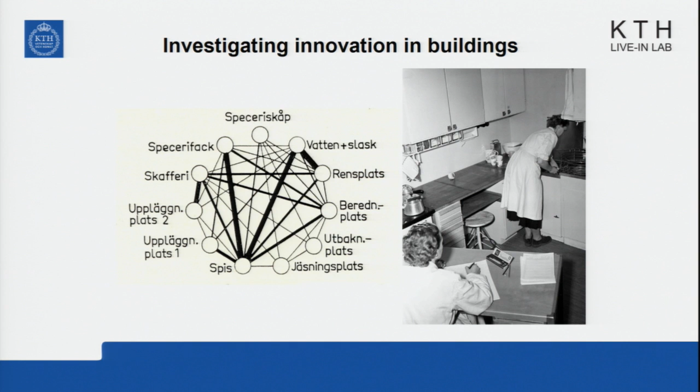I wouldn't say that. We rather have a problem when people are sitting still too much. But the regulations that we base our production of buildings on are still based on a society we do not live in. Maybe we should do this research upside down: look at how we can increase the steps we take in the kitchen. Maybe that's the society we're living in today.

Another thing with buildings: we're around 30 years behind, I would say, many other industries. Cars have auto brakes, climate control, soon autopilot. What do we have in our homes? We have to manually walk to the window and open it to get fresh air into the apartments. I don't know if that's so very smart.

We don't have the services from buildings that we would like. And still they use around 30% of the energy in the world, and they are responsible for around 40% of the CO2 emissions. Even though they don't deliver the services we want, they only make it possible to stay indoors, not joyful.

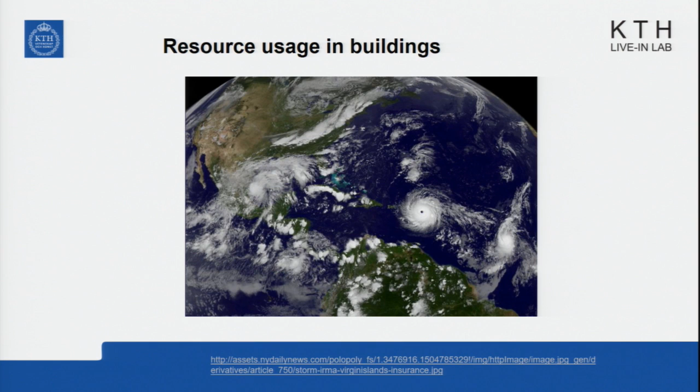So now we have a big task here. We're going to build around 700,000 apartments in Sweden over a period of 10 years. So either we can produce these buildings as Boverket likes, or not likes maybe, but they say it's okay.

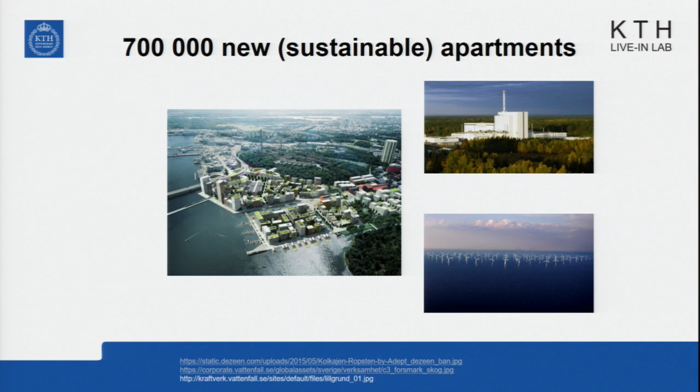We can build like old light bulbs, 90 kilowatt hours per square meter. And if we do that, then we need to produce one nuclear reactor or 1,000 2-megawatt windmills just to give the heating needed to these apartments.

Or we can produce like this, halogenlampa, I hope you understand. It's quite bad, I mean you don't want them, but they work, they're a bit more energy efficient. And then you can reduce the number of windmills needed, for example, to half.

Or you can do LED lamps and reduce the energy use connected to buildings by tenfold. You can find these on the shelves in the stores: solar PVs, heat pumps, connections between these systems, hot water storage, electricity storage. You have everything on the shelves. You just need to know how to connect these systems in order to make buildings a bit smarter and more sustainable.

But it seems like the developers do not know this, or they don't care.

So now it's my 15 minutes of fame here, so I can talk a bit about my research. I did a study a few years ago and found 37 barriers to why we don't produce smart buildings. Yeah, of course we could find a bit more, I guess, but around 37 it got saturated, I didn't find any more information.

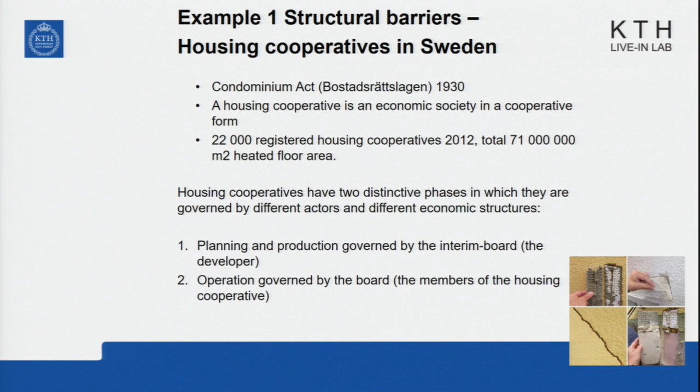So in this study, together with Hans Lind and Per Lundqvist, we propose four changes in how we can produce buildings in cooperative forms.

Either start with the basic idea from the 1930s, giving more power to the people who are actually sitting in the long-term development and ownership of the cooperative, or limiting the type of companies that can form cooperatives.

So maybe only serious companies can form a cooperative, and if you're not serious, you can only produce the building, not form a cooperative. Or introduce an official representative in the interim board to ensure all decisions taken are sound and solid, leading to long-term, smart, sustainable buildings.

Or, in a somewhat more difficult way, increase the information about the building so that people buying apartments know what kind of appliances and technical systems they have. But this is, of course, quite hard since you'd need to educate everyone in building technologies, so there could be a mix of these changes as well.

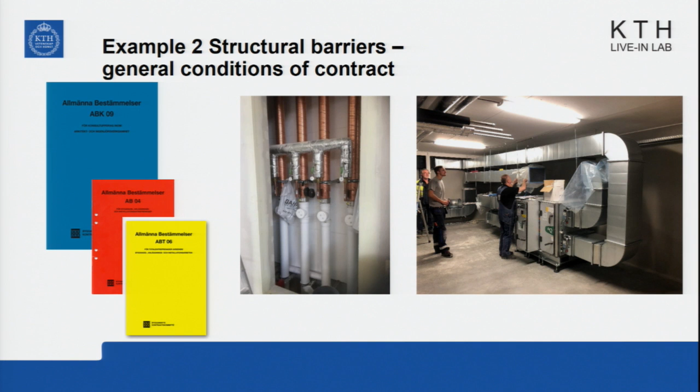These general conditions of contract were quite reasonable 30 years ago when buildings weren't so connected. But now we can control everything and connect everything, and that's how we reach long-term sustainable buildings.

But these conditions of contract lead to a situation where the consultant who proposes new technology is responsible for the outcome of that technique. They're responsible for risk and time delays, and they risk losing compensation if something happens due to the technology they proposed.

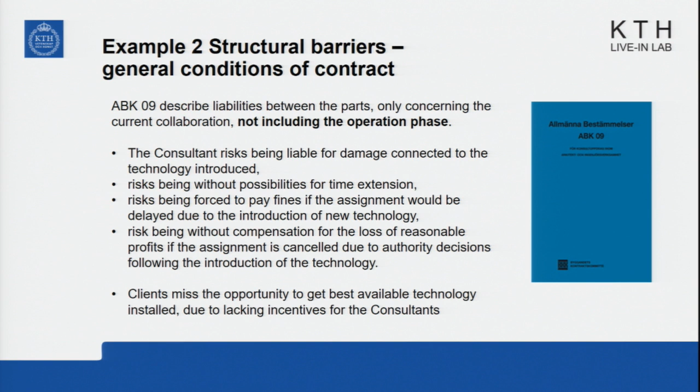But there's no incentive for the consultant to actually propose new technologies. So why should they? Of course they don't, and that's why we build dumb, crappy buildings.

I'm writing about this now, so you'll soon get the answers. But meanwhile, while this document is still what everyone almost works with, we're trying to make new technology well-proven directly, so consultants can propose techniques without risking being liable for damage and so on.

That's my third example, and this leads to the KTH Live-In Lab—we need to show that new technology works better than old technologies, or not. That's what we're also going to demonstrate.

As an example, the innovation pace in the built environment is really slow. We introduced water-based radiators, as you can see around here, almost 100 years ago, and it's still the main way of heating buildings in Sweden.

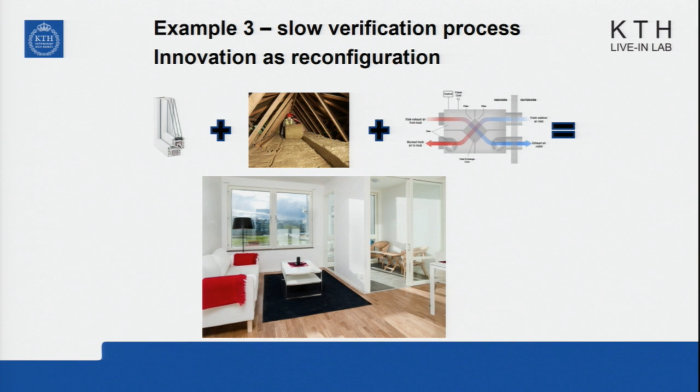But then we introduced better windows, more insulation, and heat recovery systems. All of a sudden, those stepwise reconfigurations led to radical innovation—we can take away a whole technical system. When we remove the water-based radiators, we can also put furniture close to the windows, making the livable area in apartments bigger without making the house bigger.

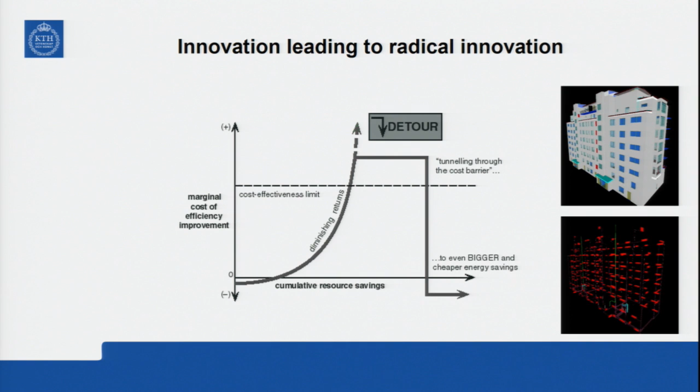So this means that every little step we took, better windows, more insulation, heat recovery systems, it makes the house more expensive, but it also makes the energy performance better. But then at a certain level, we can take away a whole technical system. As you can see here, the red dots are all the radiators in this building. They cost around 5,000 euros per apartment.

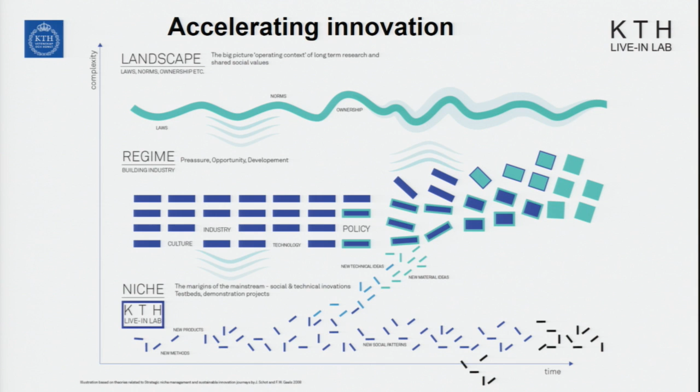So to do that, we need to have demonstration projects. That's what KTH Live-In Lab is here. We're a closed niche. We have a building permit-free area, so we can test technologies and systems and see if they work together or not. Some of these dots go out, we should not go on with them. But if we can see that new technology is working in systems, then we can propose to put them into normal buildings, and hopefully we can then transform how buildings are used and produced, and then we can also influence the regulations, the rules, the norms. So that's how we think that KTH Live-In Lab can transform the way we use and produce buildings.

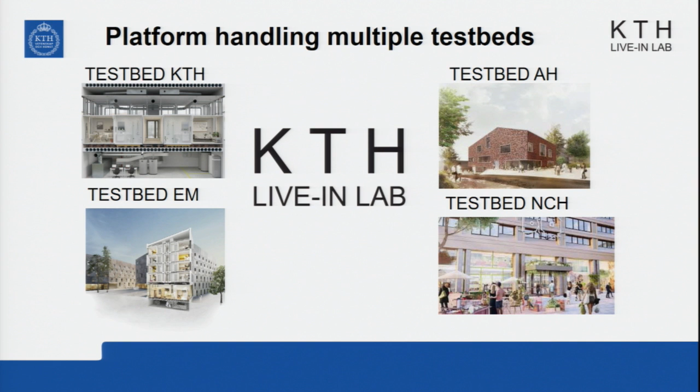So in order to show this for developers, we have started KTH Live-In Lab. KTH Live-In Lab is a platform handling multiple testbeds, but we're mainly focusing on this testbed KTH that I'm going to talk mostly about here. We're right now in the process of actually combining a few building systems, the building automation systems, into one database, so that students, researchers, companies can access the KTH Live-In Lab database, work with figures and data from different buildings, and try to optimize both control algorithms and communication and whatever. Everything to make buildings more smart and sustainable.

So this is testbed KTH, a 300 square meter building permit free area. It's situated here on Malvinas väg 14, close to the Q building, Q restaurant. The idea with this testbed is that it should be possible to do whatever research we would like to do. So we have an explosion-proof basement - there was a demand from the researchers on energy technology. And then we have space underneath the apartments, 40 centimeters, and almost 2 meters above the apartments. So the whole space is flexible with a sprinkler system, so we don't need to take the fire regulations into account. Right now we have 4 apartments here, but we can make up to 8 apartments here.

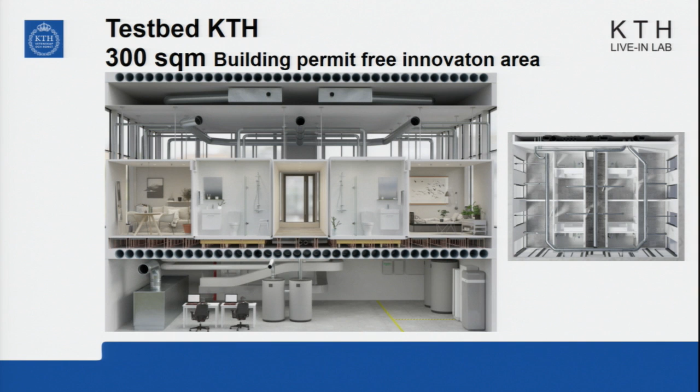And I also see that we have 3 of the persons living in the 4 apartments visiting us here, so nice that you're listening.

So the testbed Einar Mattsson, as you can see, we have the testbed KTH. It's located here. And then the testbed Einar Mattsson is the rest of the 305 apartments. So we can do bigger studies here on behavior and sustainability and so on. We get all the data from the 305 apartments, and we can see electricity, CO2, temperature and hot water and so on in all these 305 apartments as well.

So Einar Mattsson put 1,150 square meter solar PVs on the roof, combined them with 3 rather big heat pumps that are connected to 3,600 meter boreholes divided into 13 holes.

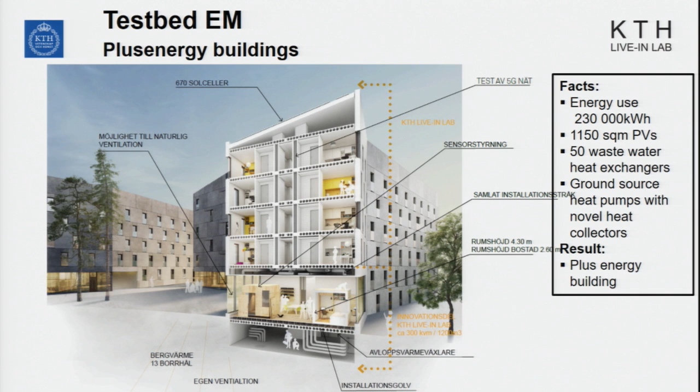And they generate heating when the sun is shining, and then store the heating in hot water tanks. Then they have preheated air going to the apartments, so no radiators, and a heat recovery of up to 90% of the heating. And then apparently, according to Einar Mattsson's research, not KTH's research, students shower twice a

day. Is that true? I've never heard anyone say yes about that. Maybe it's 3 times, I don't know. But so a lot of hot water is used in these buildings, apparently.

305 apartments, and so there are 50 wastewater heat recovery systems placed out in the buildings. And they extract around 50% of the heating from the wastewater and preheat the cold water in the shower.

So the cold water in the shower is never really that cold like it is in normal apartments. So on a day when you're really hungover, you need to use the sink instead.

This leads to a plus energy building, which means it generates more energy over the year than it uses. But there's a surplus during the summer, and then you buy electricity during the winter.

Then we have connected with Nordic Choice Hotel, their Hotel Hobo here in central Stockholm. So here it's perfect to do research when you need a big exchange of persons. So we can do a research project in a hotel room, someone moves in, and the next day that person moves out, and then you can twist the research project and continue doing the same research.

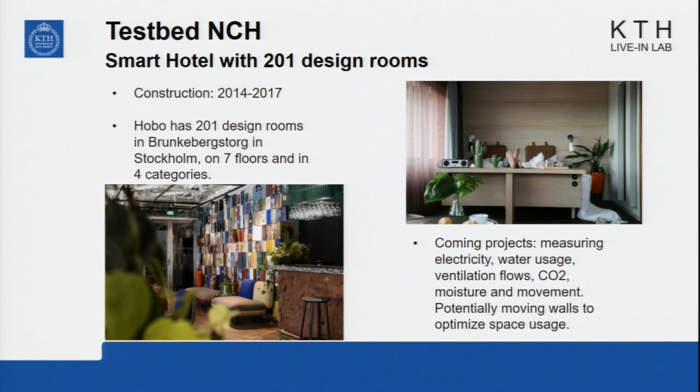Testbed Akademiska Hus, the education building, Undervisningshuset, down here on campus. There are very many sensors here in this building as well, also in the concrete to measure moisture in concrete and movement in the structure and so on.

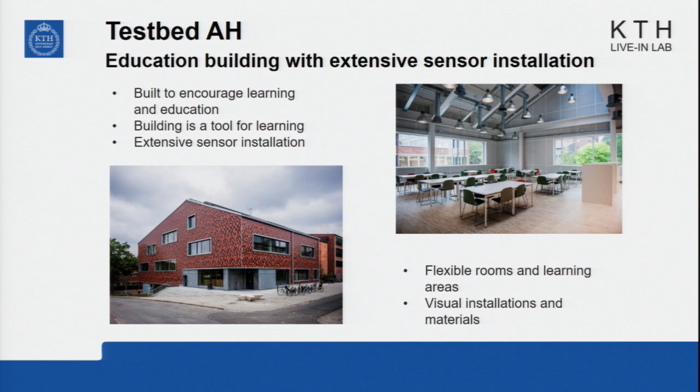But all the installations are visible, so the whole building should be part of education. So you can both be in the building and use it for education and research. So we're in the middle of connecting this building as well to our database, so we can both get access to what's happening and be able to control the building from KTH Live-In Lab.

The idea is that students, anyhow, in the testbed KTH, they move in August, and then they stay in the apartments until May. So companies and all the courses and so on are following the yearly cycle here from autumn to spring. First, do research on how new technology can be put into the apartments, and then hand that information to the

project team that actually develops next year's apartments. And then we also have courses following the apartments, looking at how they perform, if there's something we should change.

So we had a course a few years ago on how we were supposed to design the first 4 apartments. And this was a student from architect school that designed the layout that we actually built, Cecile.

So as you can see, by sliding a few walls, there is a possibility to have a public space and a private space. So if you slide the walls closed, then you have your own apartment, your own studio. And during the daytime and so on, when you want to hang out with your friends, you can open up and have a big social area in the middle.

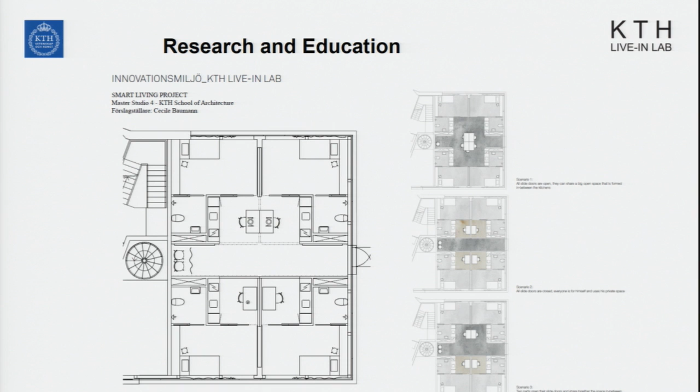So this is how we are thinking that it should be. Right now we don't have the sliding walls. We haven't found sliding walls that can handle noise and fire at the level we would like, but we're working with Ikano Bostad to try to identify these products.

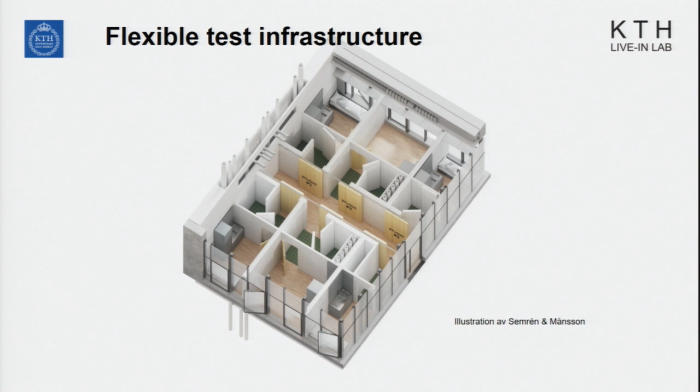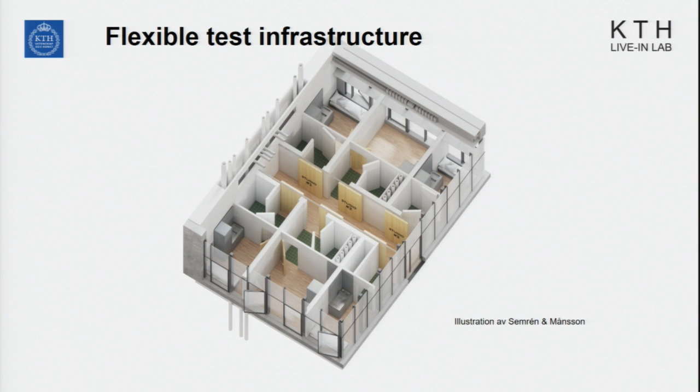And maybe two years from now, we produce six apartments instead of four. But this is also if a researcher or company would like to test, for example, how a 10 square meter apartment, how the ventilation flows should be dimensioned, how the window area compared to floor area, how kitchens should be designed in small apartments, and so on. That's something we can try, due to having this building permit free area.

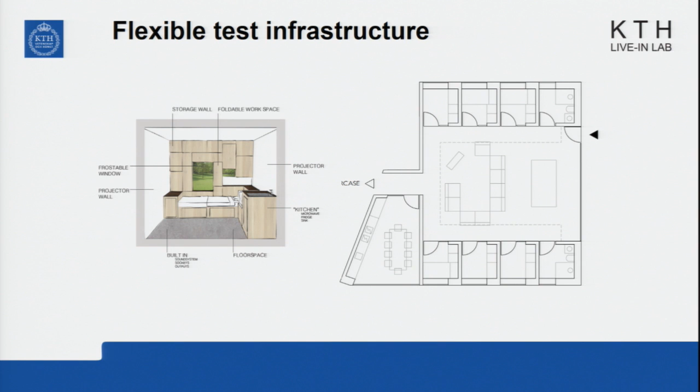A few years after that, we might look into really small apartments, but a bigger social area in the middle. And why not go to function units instead of apartments, where you can put the regulation on ventilation, heating and everything into the furniture, and have a big area where you can put your living units in.

We have identified a bathroom that is 0.95 square meters, but it's okay with all the current regulations, so you can fold up both the toilet and the sink and so on. So we'll see if we're going to put that into the living lab a few years from now.

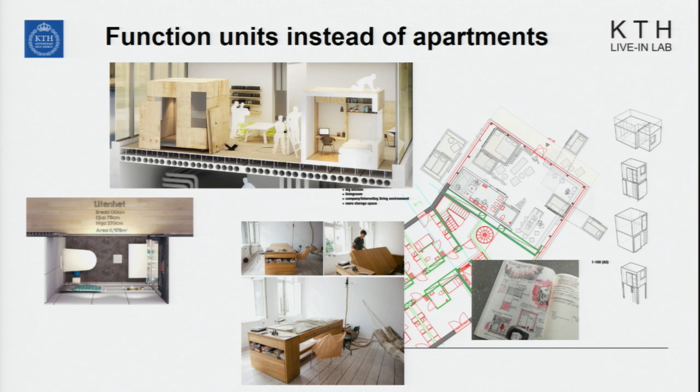But I like that it's not optimal, because then I hope that some researcher and company would like to do a research project on how we can optimize storage in apartments. So if you're into that field, please contact me, and then we can do a nice project about geometry and storage in apartments - not energy storage, but other storage.

Then we also have an office and a basement where researchers and companies can sit and do research, in close connection to what's actually going on.

And the basement has been a big success. I didn't think about that to begin with, but we have had a lot of visitors from the Canadian Embassy, and we have open house, and we also had the King visiting last week and so on. So it's a quite nice place to have nice conversations about future smart buildings.

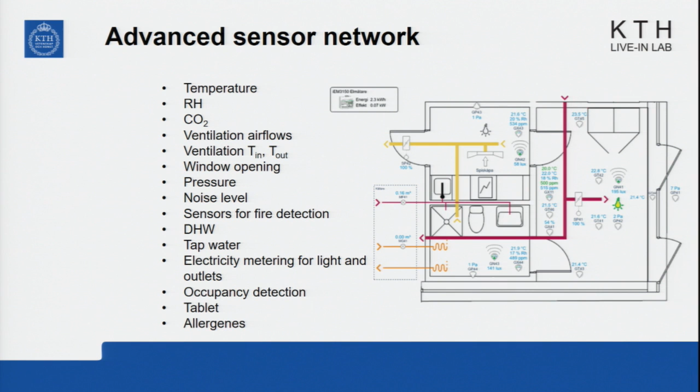But if we put very many sensors here, we also have a research project on how many sensors do you actually need to put in to make a good enough control strategy. So it's not feasible to put in all these sensors in all the buildings, but maybe it's feasible to put in 3 of these sensors in every 10th room in a building in order to make it good enough. So that's one research project that we have.

Right now we're working with Schneider systems here to control. So they are trying to find when their system is crashing. If it crashes here, then they can optimize it, and then it won't happen out in the real world, so to speak. But we're also putting in different side systems to see which system is best and how we can reach more open source systems.

So we're working with Vasakronan and their real estate core and trying to see the benefits of different technical systems to control buildings.

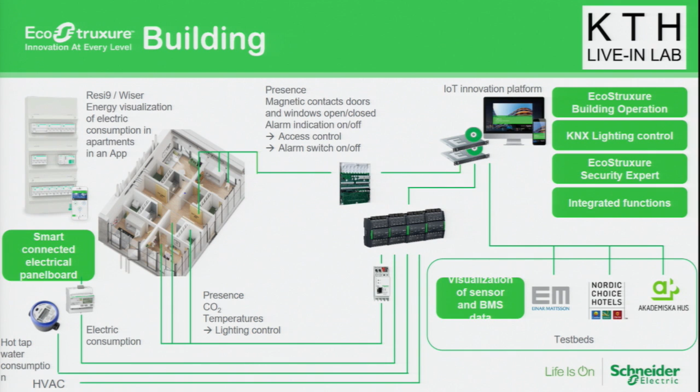If you would like to do a project in KTH Live-In Lab, there's a process where you apply on our homepage to do a research project. A company called Greytech applied to us, wanting to look at how grey water reusage could help with both resource usage and heat recovery in buildings. So I told them they needed to find a researcher to work with, and I connected the company with David Nilsson at Water Center. He formed a team with almost 10 companies and Värmdö kommun, and we also brought in HSB Living Lab at Chalmers, and after a while we got funded.

Two weeks ago we got the answer: 9 million from Formas to research grey water reusage compared to just heat exchangers in buildings, and the system effects these systems have. If you have grey water reusage, you can lower water usage by up to 60% in a building, meaning you might not need a new water cleaning facility in Stockholm for another 20 years instead of 10. But if you only extract heat from wastewater, you might get system problems with bacteria in the wastewater treatment facilities.

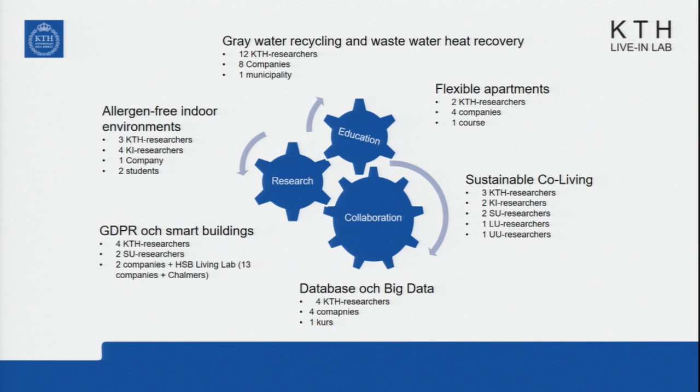But then when we start to work with the data there, we need to work with GDPR and integrity. And then we also need to work with the database, how we store data.

So all the projects are kind of connected to each other, and that's how we want to work with Live-In Lab. If you want to do research and not share data, then you can go somewhere else.

So if this sounds interesting to you, whether it's to do a master thesis, a research project, or to test a product, you can go to our homepage and apply to use the test infrastructure.

We don't have funding ourselves, but we can, together with you, form a research project in order to get funding. So this is more an infrastructure than a funding part, so to speak.

Thank you very much, Jonas. Do you have any questions for Jonas? Raise your hands. Yep.

Thank you for that. For the nudges thing you were talking about, after the 3 months of people using it and then 3 months after, have you observed if a change in behavior has actually happened? Have you gotten that far, and has anything actually been recordable?